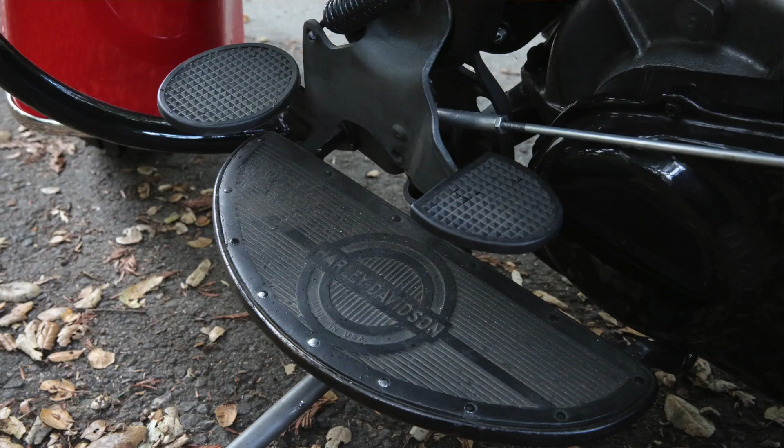All the sheet metal on this bike is original. The speedo dashboard, the tank, both fenders are all original. The floorboards are also original. The foot controls, I believe, might be replaced - a very good reproduction. The seat is original as well.

Things I know that are reproductions would be the exhaust system, which would be very difficult to have an exhaust system looking that good on an original bike. I've replaced the handlebars, also reproduction, and the grips. The previous bars were noted as being later models, so I got the correct year.

It's still a 6-volt system because I'm going for the OEM look, but part of my belief here is if you can make them safer and more reliable, and it's not noticeable from the outside at least, I go ahead and do it. So my voltage regulator is state-of-the-art.

It's a solid-state unit with LEDs to let you know if the polarity is correct in the generator, for instance. Pretty high-tech stuff. The generator itself is also late model, high-tech. You're never going to get stuck with this bike because the battery went dead.

I haven't started this bike since September, where my son and I went on a national rally in Monterey, California, which was a great ride.

Okay, let's take this guy out. Let's see if we can make it go bang for you.

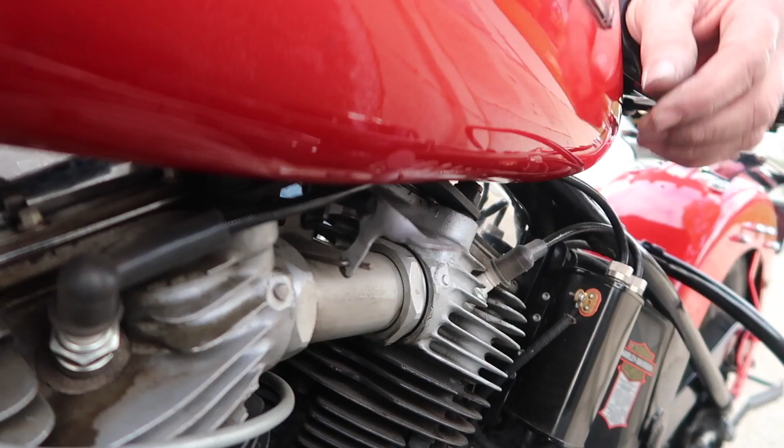Full open. Next thing I do is full choke, that's all the way down. Okay, next is the spark advance.

You don't want it advanced when you kick it, it'll be really hard. So I have to move this distributor to the fully retarded position, which is where this post lines up with this screw head right here. It's all the way to the right - as you can see, it'll stop right there. That's fully retarded, and it'll make starting this bike a lot easier.

After it starts, you want to quickly bring it to the full advanced position and let it warm up, then take it off choke when we're ready. The choke's on full and it's been retarded all the way.

What you have to do is give it full throttle, so it's wide open throttle, and 3 primer kicks minimum. You could kick it from one side of the bike or hop on it. I'm gonna hop on it right now and give it 3 primer kicks, and they gotta be good kicks, with the throttle wide open.

One, get the compression right. Two. Three, and we'll give it one more - four. Now I'll roll off the throttle. You see me rolling off?

I'm going to take it off choke, give it one click of choke just because it's cold here. Then I'm going to turn the ignition on - we should get some fire. That's just the ignition, one more click turns the lights on. We don't need that. And come back up on top dead center, full retard.

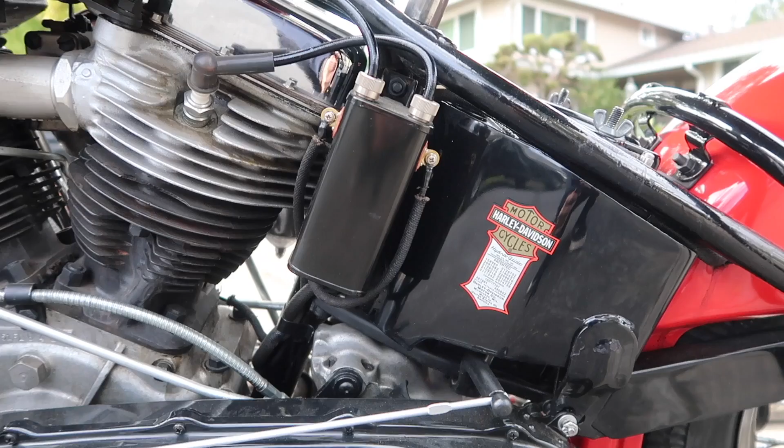It starts with your foot clutch, works like this - step it down as the clutch is engaged. Now that the idle is nice and low, I can slide it into first. There we go, we're in first gear.

I'm going to pull away and go up and down the block for you a couple times. How's that?

Hi, I'm in front of my lathe now, and this is a machine that I use a lot in the machine shop industry. It's for turning metal. I got a piece of stainless steel in here, but I've also rebuilt crankshafts in here and made an awful lot of vintage parts that are no longer available. You do it in a lathe.

Very precise. If you look up here, you'll see a little model of a motorcycle that I started when I was 21, quite a few years ago. But it's a passion, as you can tell. I love this stuff. Above that is going to be my next project.

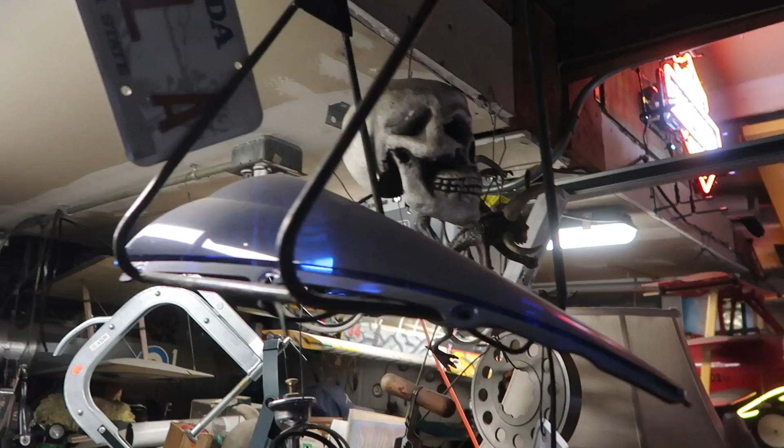I don't know if you got that in frame, but it's a Bonneville salt flat racer, which I'm going to be building. This blue windshield is from a modern bike, and just by chance, it might be perfect for my Lakester.

We've held it up to the body, which you may see outside hanging on my fence, but this body is a sheet metal drop tank from an auxiliary fuel tank to a P-38 escort fighter during World War II. They needed to escort the bombers in to run their missions and protect them. The only way they could do it was with these drop tanks.

Ever since the end of World War II, hot rodders have been using them on the salt flats trying to gain speed records. That's what I'm going to try to do.

To go full circle from this spot I'm standing at, you'll also see a poster up here that I had at a show when I was about 19 years old. I had a '42 BSA, and that same poster was with me my whole life. It's a picture of a V-twin BSA. It's a rare bike, and I just found one. I've never seen another one like it, so I'm going to grab it.

Here in the shop, we've done bikes for a while, obviously. I've got some awards I've won over the years, in the last 10 years since I got back into it. Built a 1920 board track racer that won best in its bracket at Barnaby's Machine Shop, which was a really cool tracker night. You'll see the tracker night number 7 there, which I got for best modern bike with my Triumph. Best in class is a race ridden, my son's '63 Norton. Also won a promoter's award.

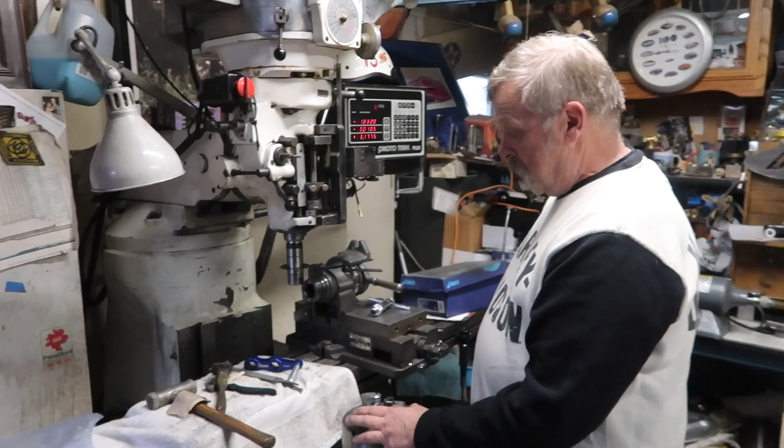With this milling machine that I'm standing next to, I was able to balance the crankshafts, rebuild numerous parts on both bikes, balancing everything and making sure all the bushings fit correctly between the lathe and the mill. I don't know how we would do it any other way.

Each part gets thoroughly inspected before it's assembled. It's not just a matter of putting pieces together, but rather inspecting each and every piece before it goes into the assembly.

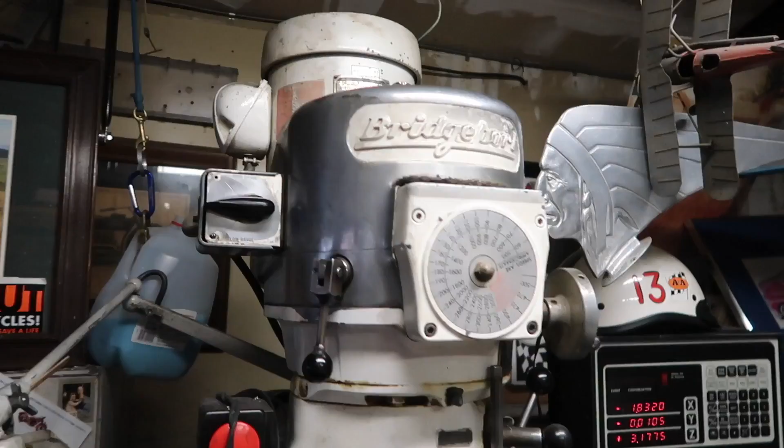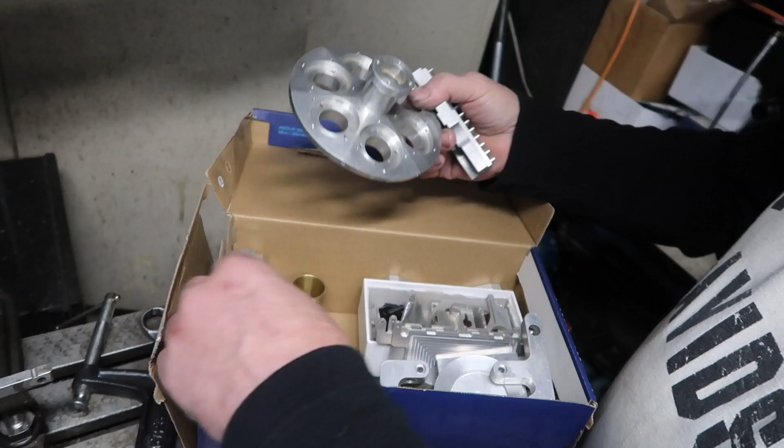This is where I do most of my work. My bread and butter work is right here with the mill and the lathe. And I just want to get you into this little box here real quick. This is what I really do for a living: it's precision parts for high-tech companies. It's what I've learned on, it's what I've done, probably for the last 37 years now.

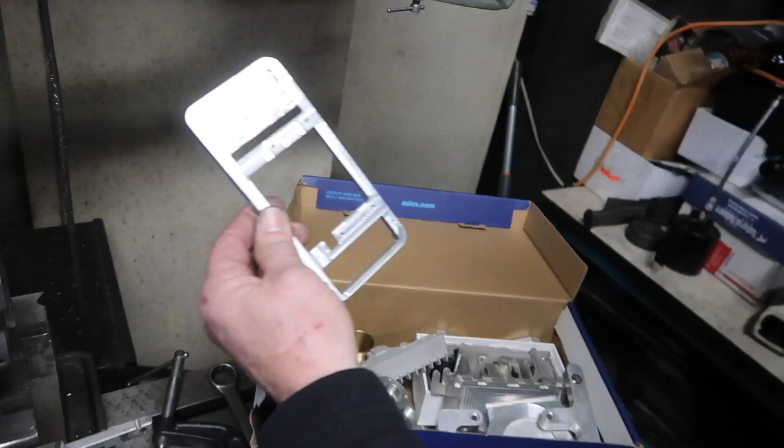This is a frame to a cell phone. I don't have my phone on, but you can certainly see that. I get involved with some late model stuff, and of course the motorcycles, you can't get any older, old school technology. So it's a passion.

It's something that I've always done, and it drives me, makes it worthwhile waking up in the morning doing this kind of stuff. I was asked once what would be the pinnacle, the high point of what I've been doing my whole life. I'd have to say the world record sale. That bike got it down pretty good. We sold it 3 years ago at Mecum's auction in Las Vegas.

And I own the world record sale of this motorcycle. It's something else you can look up online. It's the proudest moment of my life, other than my kids being born. My oldest boy was there at Mecum's, and the whole thing is over in 60, 90 seconds.

I did a lot of research. I groomed the market a little bit. I knew the guy that bought the Chief, which was the record sale for the Chief, and I kept in touch with him, told him I have the Scout, which is the cousin version of that Chief, in similar colors, except it was negative -- the red was where the black was supposed to be, and vice versa.

Kept in touch with him, kept in touch with a couple other guys, and it turns out an Alaskan lobsterman with a very large collection bought it. He was very happy, and I love getting into the bidding war. That was something we'll never forget.

We were talking a little bit about this when I had breakfast with my son and daughter-in-law. They both were there, and that made it really special. I told them what I set out to do -- I told them I wanted to get a record sale. The previous record was set in 2007 by a very reputable builder.

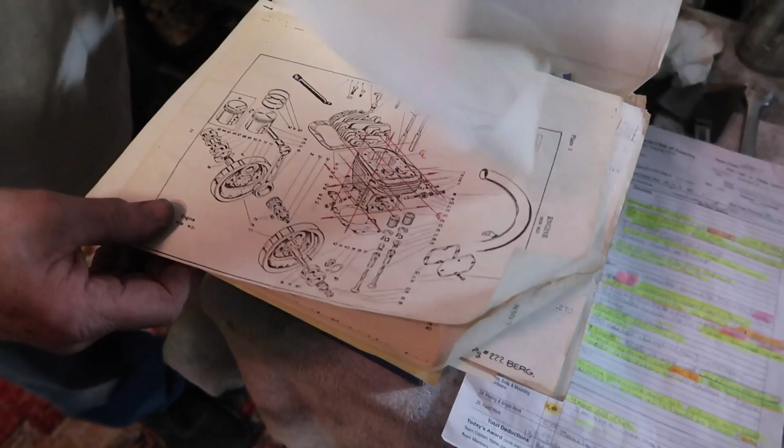There's a design on the spoke wheels, for the model. This is the model. You can see the angle. Look how straight his circle is—I mean, how round the circle is.

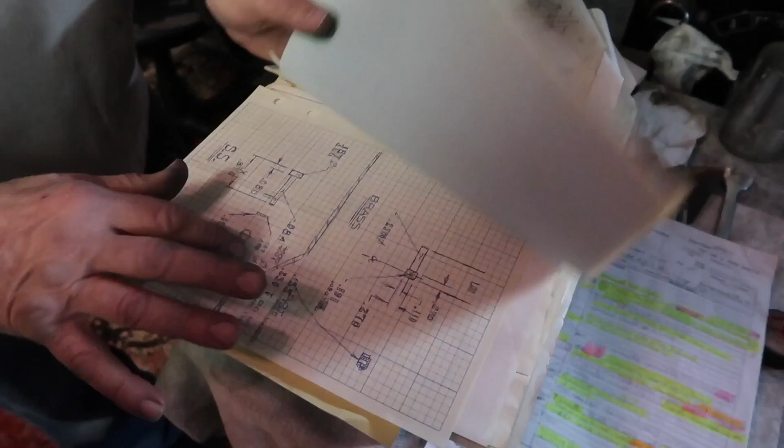This is all the print that I made for that motor. Sketches, I guess a lot of freehand copies. But this one with this is the neatest one of all, I think. No, the frame—I got to find the frame for you.

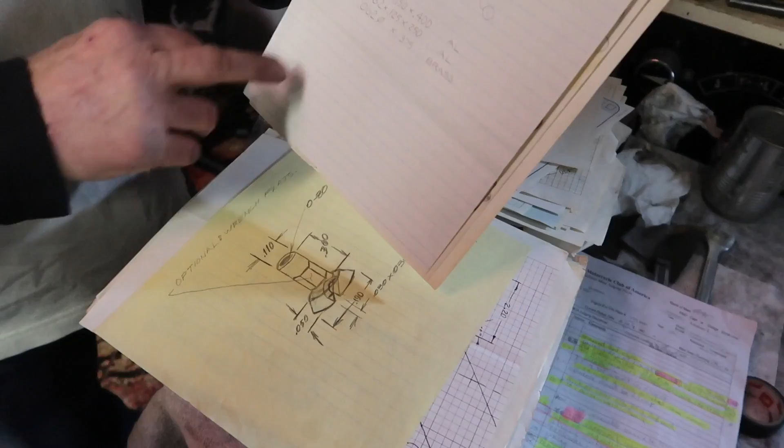Sidecar, top view. I was a young man when I did this. Front end sketches, I think, or shifter release. Everything's very detailed, like old school isometrics. This is the door latch to the sidecar, kind of, with all the calculations. Yeah, it's just crazy that you built this completely by yourself. This is a nipple to the spokes.

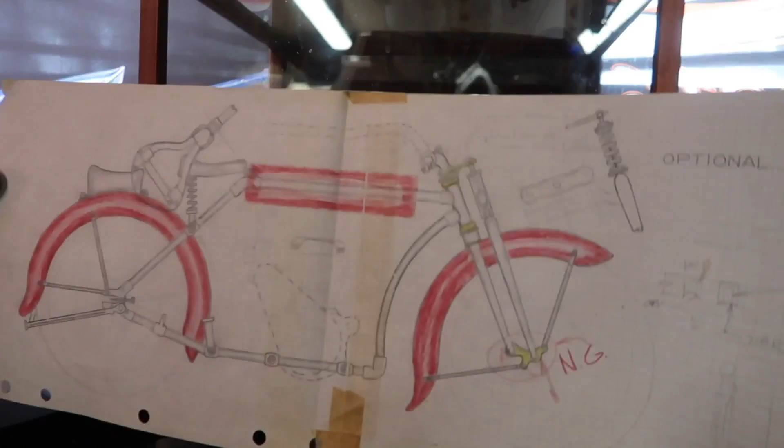Tightens the spoke onto the rim. But what I'm trying to find here is a piece of paper. This is it—isn't that cool? It's almost scale, before and after. So that'll give you an idea of the mind involved with this passion that I've been, I don't know, cursed with or another, you know.

So I found this, but what I was looking for was the information on that Eindecker. So all because something's old and somewhat cool doesn't mean it's going to be a grand slam. It might not even be a base hit.

So just real quick, as you know, I don't have all the original tools, but I got the original owner's manuals. This particular manual—I got one, was pretty cool, but then I found a better one, because that's what I do. I find the best stuff available.

This book will cover you up until about 1956, maybe 1957, I'm not sure, but it's a hardtail. It's for this bike. The pictures that you see in here are for the 1957 model, so it's at least for this. And it's great, just great to have.

The tank emblems are a little different. Some of the trim—you've got 3 trims on the rear fender back there, those little spears. Other than that, it's the same bike.

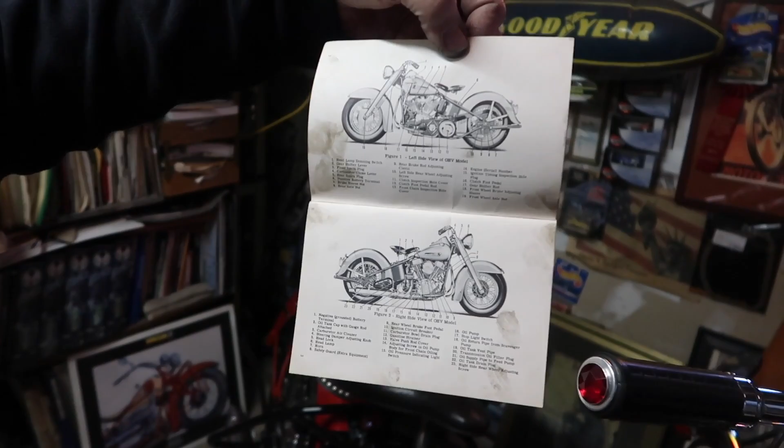Even got into the detail of this chain tensioner inspection cover. In certain years, the mounting screws were vertical; many times you'll see them horizontal. All the replacement and reproduction primary cases, like I discussed earlier, I have a reproduction primary case on mine, but I made sure that my holes went vertical because that's the way they're supposed to go. So I get a little carried away, but that's how I do it.

This is something that I built about 25 years ago. I saw the magazine article. If you get up underneath this airplane, you'll see the little motor. And that picture is my son here—I'm going to get my hand on it. That's Johnny playing with it when he was a little guy.

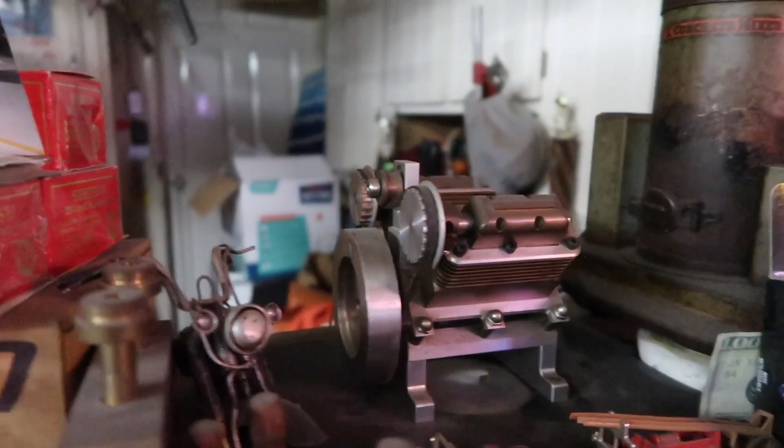Now, John just bought his motorcycle, his Yamaha SR500. So Johnny's playing with the little steam motor, but that's the same motor he was playing with all those years ago, and it still works great. Wow, and it's Johnny.

That's cool, and it works great. I got inspired by this little article here, this cool little model book with drawings in it. If I see something I get inspired by, I want to try my skills, I'll just make it. That's the passion of what I do. I see something I want to make, and I'll make it, doesn't matter what make or model.

Like you said, you keep a broad variety, you don't get too good at any one thing, but you get an education. I did the Harleys, the 1920 Harley, the 1938 Indian, the 57 Triumph, the 63 Norton, and now the 51 Panhead. We're going to Bonneville with the next project. That's where the education comes in, where I don't settle into one spot. I do all the work, so I get the full benefit and education from these projects more than anybody. But I could tell you everything about it when it's finished.

Building motorcycles, especially vintage ones, came at a really early age. We were kids in school drawing pictures of hot rods and old cars in grade school. As soon as I could, I'd be restoring wooden furniture, bicycles, anything I could get my hands on. I was once given a bicycle from the turn of the century, pretty rotted out, needed some tubes replaced. Little by little, even as a kid, you can accomplish this. When I saw the reaction from people, it was amazing how we could restore something from pretty much a rust bucket. I just enjoyed it.